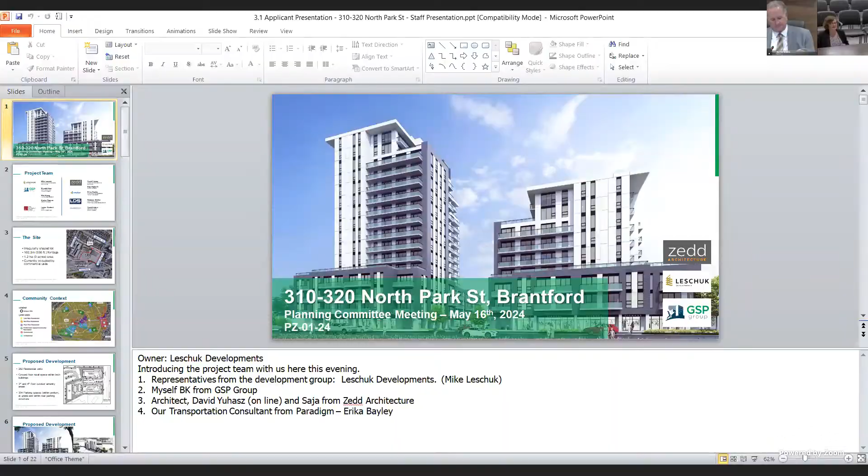Good morning, Mayor Davis and members of committee. My name is Brenda Case. I'm from GSP Group and I represent the owner, Leschuk Developments. With me here today is Mike Leschuk, the owner. Good morning, Mike Leschuk, 16 Kershaver Terrace in Brantford. Also with me today from the architect, Zedd Architecture, I have Saja, and David may possibly be joining on screen. In addition, we have Erika Bayley, our transportation engineer, here to answer any questions regarding traffic.

Next slide, please. And the next slide.

As you all know, I'm sure you've all been to this site a number of times, but I thought I'd provide you a little bit of context.

Directly north, you can see the Northland Gardens development, a 70-unit, two-story townhouse development with an access driveway that runs parallel to the north lot line of the site. To the east, we have apartments ranging in height from 7 to 12 stories. To the west, we have the Hayhurst Village condominium development, with a parking lot and underground parking structure immediately abutting our western property line. That development is a 4-story condominium development.

And then finally to the south, we have a retail plaza, basically 1 story in height, which includes Shoppers Drug Mart, some restaurants, an ethnic grocery store, and other local commercial uses.

So the site overall is relatively flat. There aren't significant grade changes. It does slope to the back.

With respect to vegetation, we have some existing trees along the west and south property lines. A tree preservation plan has been undertaken, and we're looking at saving 11 trees along the west and south property line. The remainder either have symptoms of disease or defects and are recommended for removal.

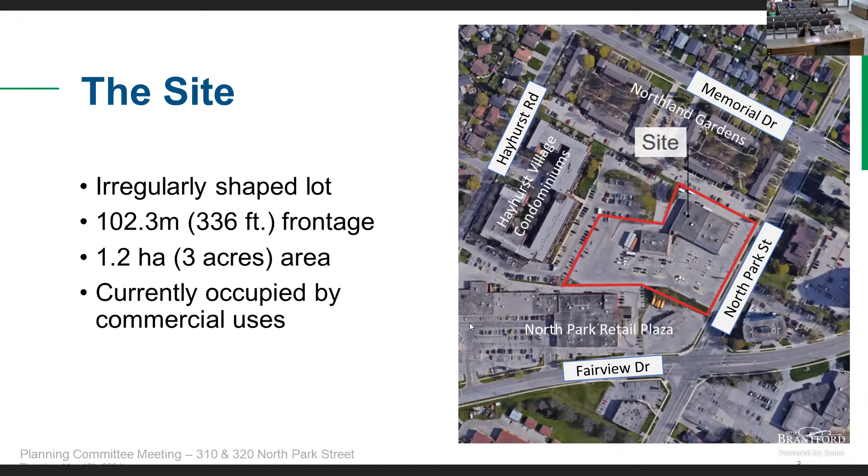Further to the north, we have generally a low-rise residential community with singles and semis.

To the south, we have the Wayne Gretzky Sports Center. We have several parks and schools that surround this area. So overall, it's a low-density residential area in the wider community.

But when we get to North Park Street, we have larger parcels and larger blocks of land. The site itself is well serviced with proximity to retail stores, restaurants, grocery stores, and community facilities. The Lynden Park Mall is further to the east. So all in all, it's a great, centrally located location.

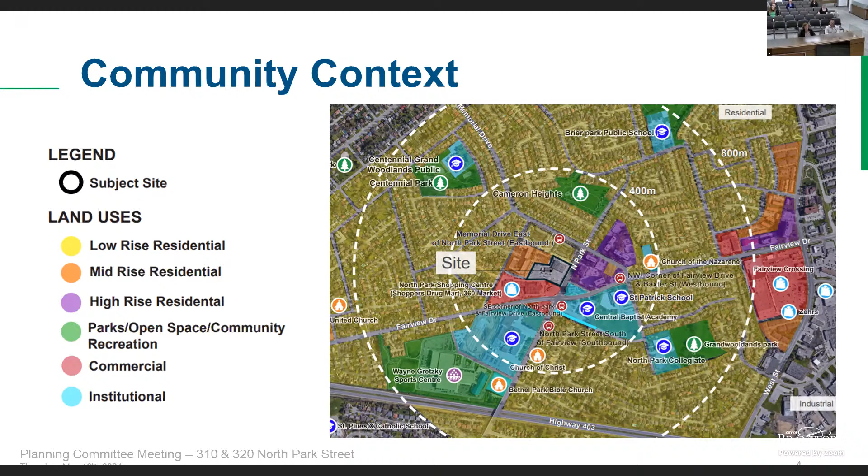Now we're getting to our proposed development. This is a site plan, so you're looking down on the development. What we're looking at is roughly 282 residential units between 2 buildings.

They're 1 and 2 bedroom units that we're proposing at this point in time, ranging in size from 50 to 100 square meters roughly, which is about 500 to 1,100 square feet in size.

We have ground floor retail space in both buildings and outdoor amenity spaces in the form of rooftop amenity areas, as well as indoor amenity spaces in the form of a gym and multi-purpose rooms. Each unit will have its own balcony.

In total, 304 parking spaces are proposed. That's 1 per unit, as well as parking for the commercial uses and visitors. No parking variance is proposed or required as part of this development; we comply with the zoning bylaw with respect to parking.

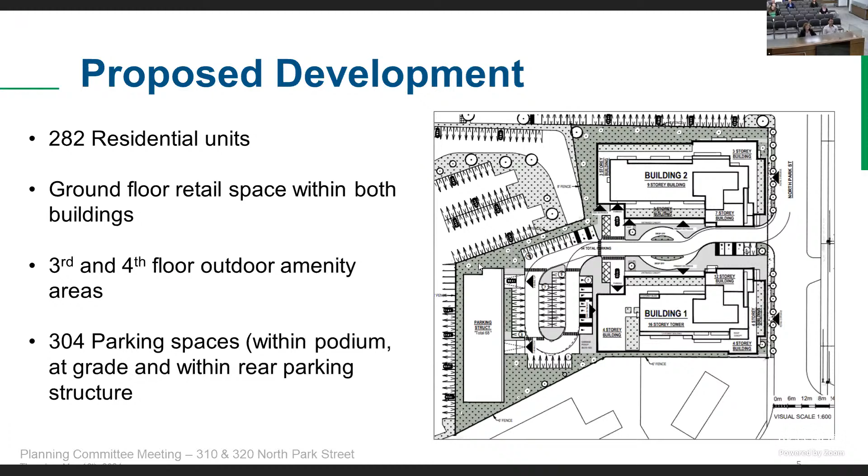This gives you a better idea of what we plan to build, not hope to build, what we plan to build subject to approval.

The building is massed in such a way that we have a defined podium, meaning the bottom part of the building. On one building, it's 4 stories in height—the one on the left is 4 stories. The one on the right is 3 stories in height.

They're both located in a strategic location, with a prominent presence along North Park Street, which contributes to a strong urban edge. So we're talking about new urban development with a strong urban edge that is pedestrian friendly.

The bases for both buildings are designed to be in close proximity to the property line to allow for easy access to the commercial units along the ground floor.

But the ground floor itself is pulled back 6 meters from the property line to provide for a colonnade, which would be covered with a roof. The 2nd story above it provides protection for shoppers and creates a nice area. If we had a restaurant there, you could have an outside patio, and we can provide more street furniture and those types of things.

Both street facades consist of architectural facade treatments, canopies, and extensive glazing, which allows for visual interaction, creating a welcoming and engaging environment. The space between the curb and the building facades along the street offers room for softscape and hardscape treatments, featuring walkway connections to the building and the sidewalk, as well as bike racks. Through the site plan approval process, that space will be more clearly defined with planters and other types of amenities.

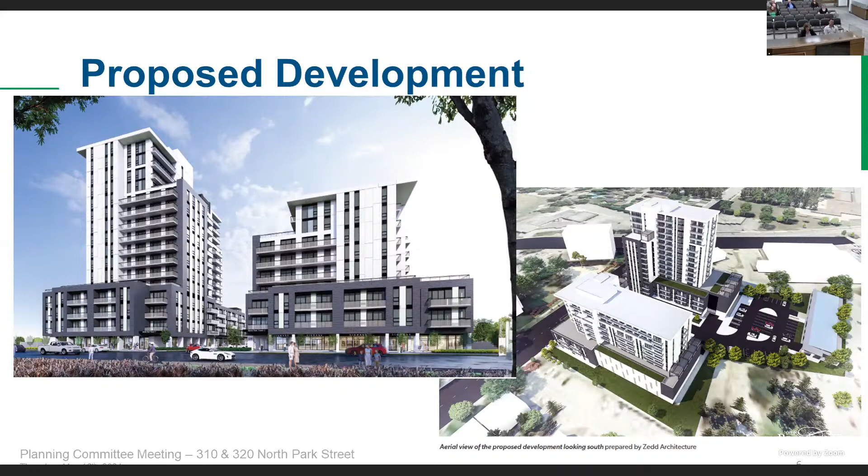This slide gives you an idea of the colonnade, the covered roof. This is the space between the two buildings, and that cover wraps around the building and along the frontage as well, providing a nice, safe pedestrian area separated from the street and the driveway.

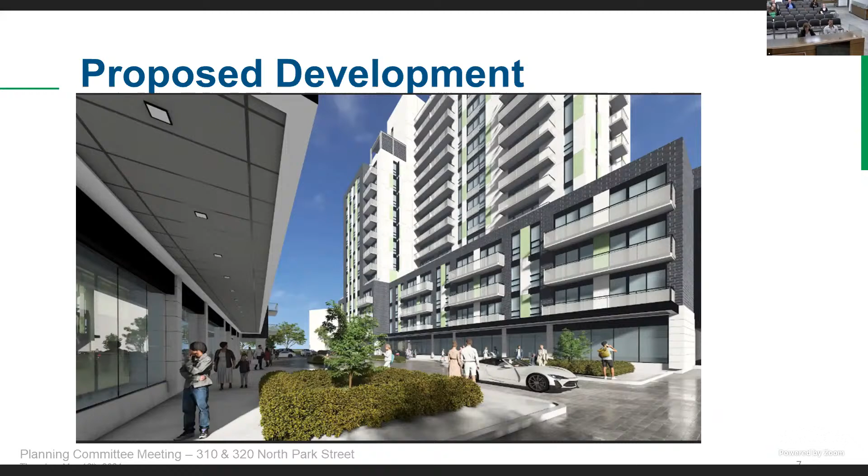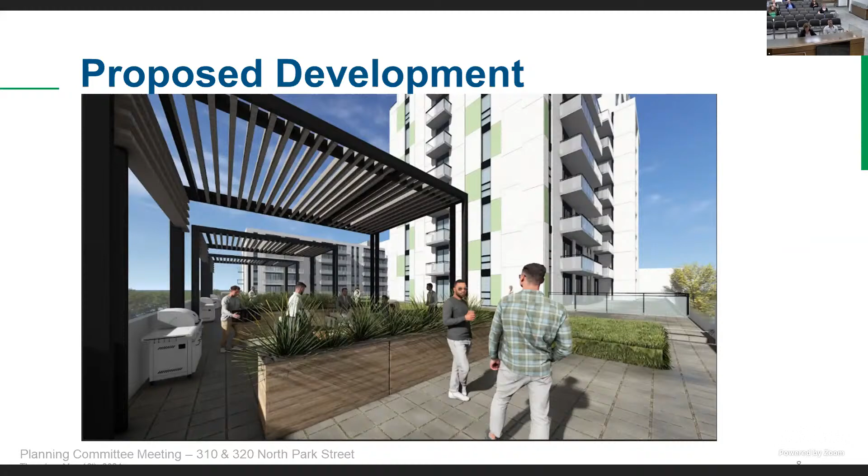From an official plan perspective, based on the 2051 official plan, the site is located within the residential land use designation. That designation permits mixed-use buildings greater than 6 stories in height, subject to a set of criteria, loosely summarized under section 5.2.1M of the official plan. It identifies that the site has to be a suitable size for the development, providing enough space for landscaping, amenity features, buffering, parking, etc. That is something that would be evaluated by staff.

In addition, the city encourages high-rise buildings with structured parking. A large part of the parking will be provided within the two buildings, as well as surface parking and a parking structure at the back. It needs to be located in a highly accessible location, accessible to public transit along a major collector road, and in this case we meet those criteria. We are within less than 250 meters from public transit, and we're close to various community amenities and features, which I discussed at the beginning. So basically, the proposed use and height conforms to the official plan, and an official plan amendment is not required for this development.

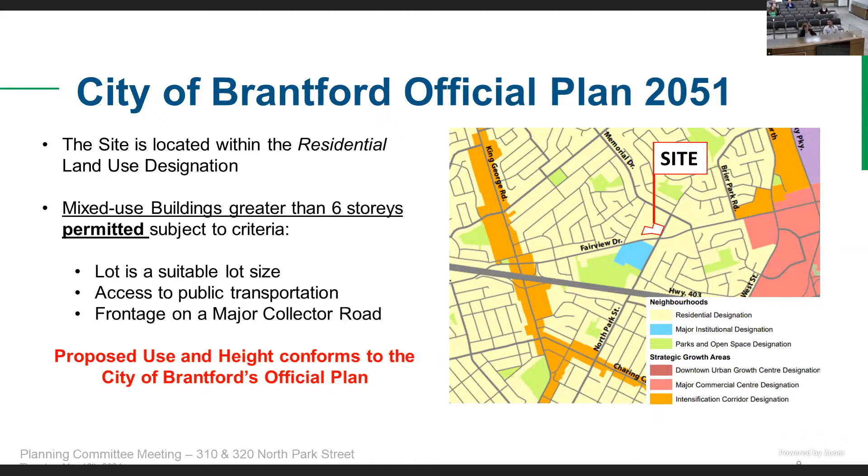So why are we here? The existing zoning bylaw 160-90 zones the site in the C10 Community Center Commercial Zone. We're not looking at changing that zone; we're looking at modifying it. The C10 zone allows mixed use developments in certain areas, and the map within the zoning bylaw identifies where C10 zones for mixed use developments are permitted. Our site is not one of those sites, so we are requesting that it be included, allowing a mixed use development on this site.

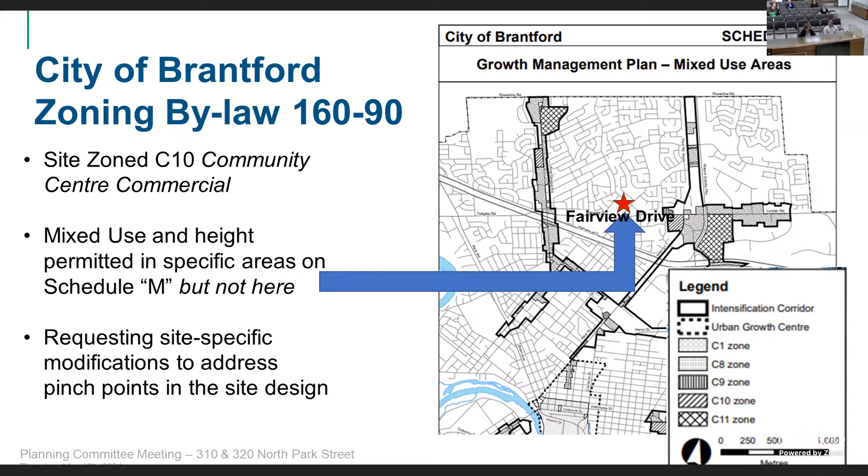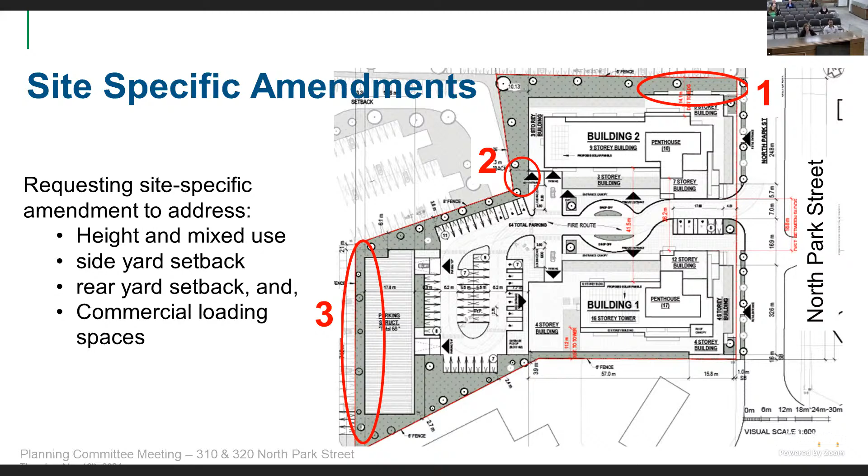This slide shows where the modifications are proposed. Number 1, at the northern boundary of the site, we need a side yard setback modification. Number 2, at the western rear yard of the site, we need a zoning modification for that rear yard building setback. Number 3, we also require a rear yard setback modification to address the location of the 1-story parking structure.

Let's start with height and the mixed use. Building number 1 is a 16-story building, and building number 2, at the north side, is a 9-story building. The image at the top right illustrates this: the red line is what the zoning allows right now, a 6-story building, whereas the portion of the building above that red line, where the blue line extends, is what the zoning bylaw amendment is for. The blue line demonstrates that the official plan allows that height, so we're looking at it on a site-specific basis.

Is this height appropriate at this location? It's permitted subject to criteria, but we have to ensure, based on the modifications we're requesting, that the height is appropriate. So we're requesting a mixed use at this location. Based on the community context, we think this is a great location for a mixed use development. There's commercial development on it right now with a sea of concrete parking. What we're looking at is providing a more active development with more active street frontage commercial uses and residential units above.

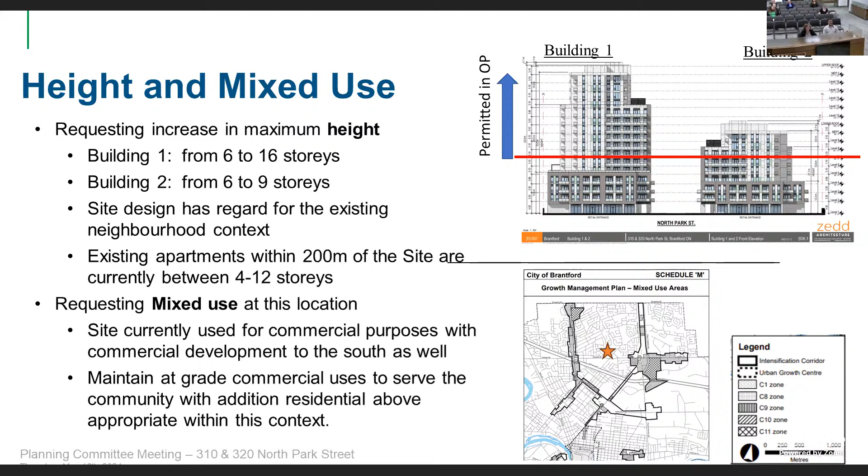Often residents are concerned about shadow impacts of the development. So the consulting team undertook a shadow study based on the city's site plan manual guidelines for shadow studies. Based on those guidelines, the shadow impacts of the proposed development on the townhouse development to the north, as well as the condos to the west, all meet the city standards. When I say no impacts, it doesn't mean there's no shadows, it means there's no unacceptable impacts based on the city's criteria. I'm going to go into a little detail in the next couple of slides, but there is a detailed shadow study.

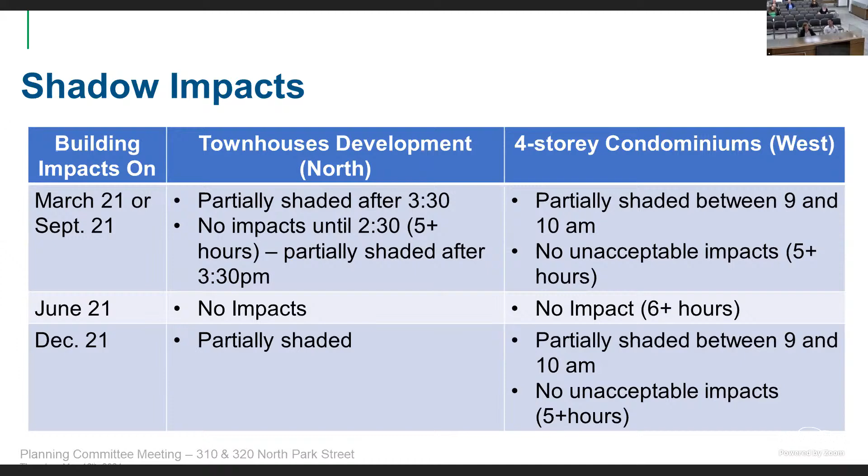This slide shows the spring equinox, which is one of the dates we have to address in our shadow study. To the north townhouses, there's no impact until 2:30, but there's still 5 hours of unobstructed sunlight to the north. To the west, we have partial shading between 9 and 10 a.m., but other than that there's no impacts and full sunlight for plus 5 hours. On March 21st or September 21st, the sun is at a certain location and it moves, so the shadow will move as a result.

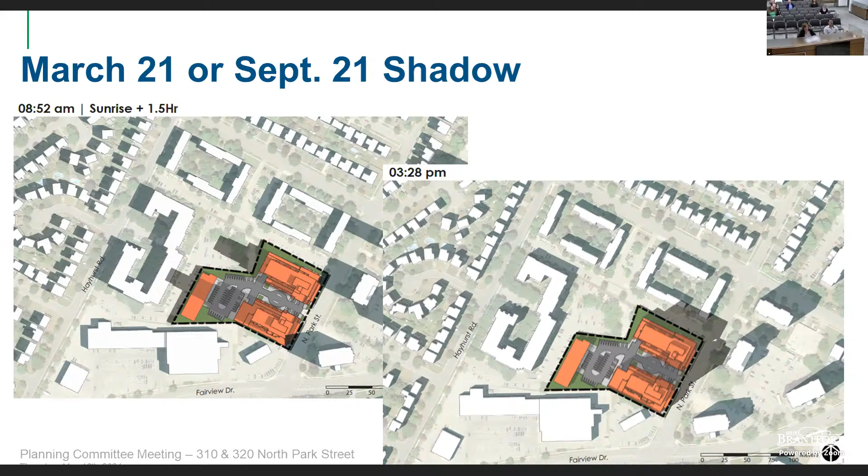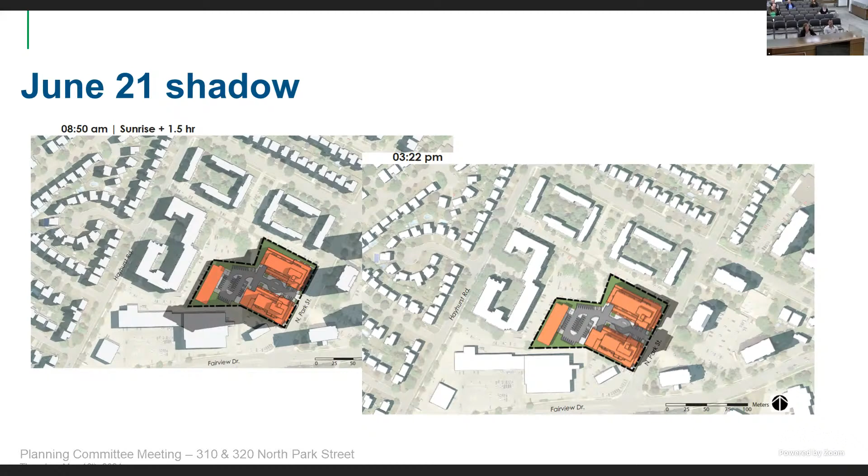The next one is the summer solstice, which is the longest day of the year. This demonstrates that there are no impacts to either development based on the guidelines. So based on the summertime shadows, there should be no negative impacts from shadows.

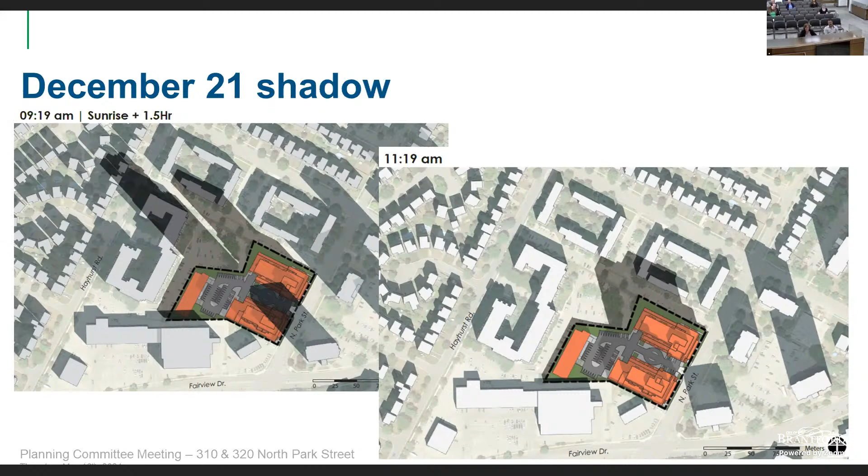The winter solstice plan shows that this is when shadows are their longest, the days are shortest, but the shadow again moves. We have partial shading between 9 and 10 a.m. to the west, but there's still 5 solid hours of unobstructed sunlight. To the north, the townhouses are partially shaded as well. This is the time of year when fewer people are outside, the days are shorter, and that's why the shadow impacts are acceptable from the city's criteria.

Next, I'm just going to quickly go through the site-specific modifications we're looking for. Let's start with number 1, which is the interior side yard setback at the north end of the site.

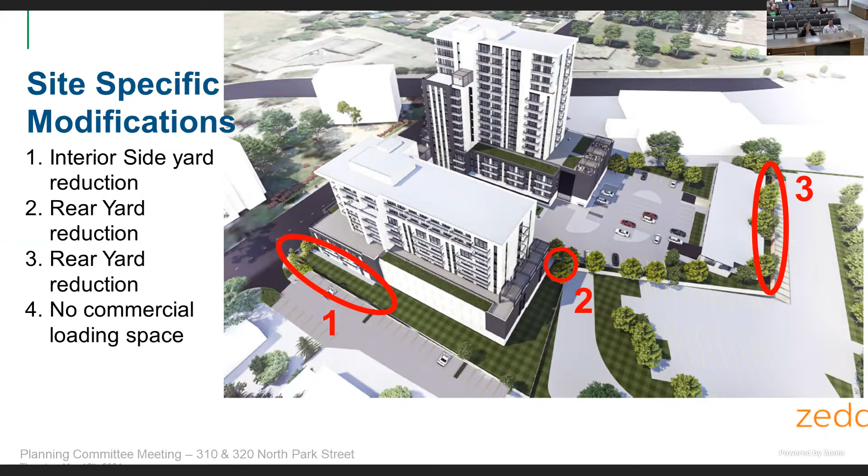The variance we're requesting is 6 meters versus 7.5 meters required. The reason we had to shift the building further north was our access driveway was located too close to opposing access driveways on the east side of North Park Street. By shifting the access in between the two buildings further north, we ended up needing a small variance at the north end of the building. This particular side yard abuts the access driveway to the townhouses to the north, which is their parking lot and access driveway.

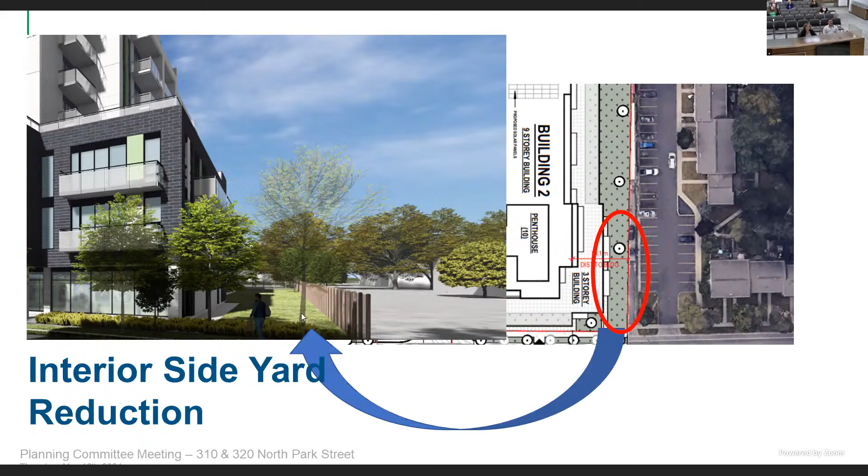The remaining 2 variances pertain to the setback of the parking structure, as well as the building setback from that corner, the pinch point. We're going from a required 7.5 meters to 6 meters at the pinch point, but 3.3 meters where the parking structure is located. That variance from 7.5 to 3.3 meters is larger than we'd like it to be, but that area backs right onto a parking lot and the underground parking structure of the Hayhurst development to the west, so the impacts to the residents' balconies won't be negative.

We're looking at putting a solid board fence along that lot line, as well as plantings. That particular parking structure is only 1 story in height, and we can deal with the details at the site plan approval stage in terms of the construction of that building, as well as what type of plantings and fencing would be appropriate along there.

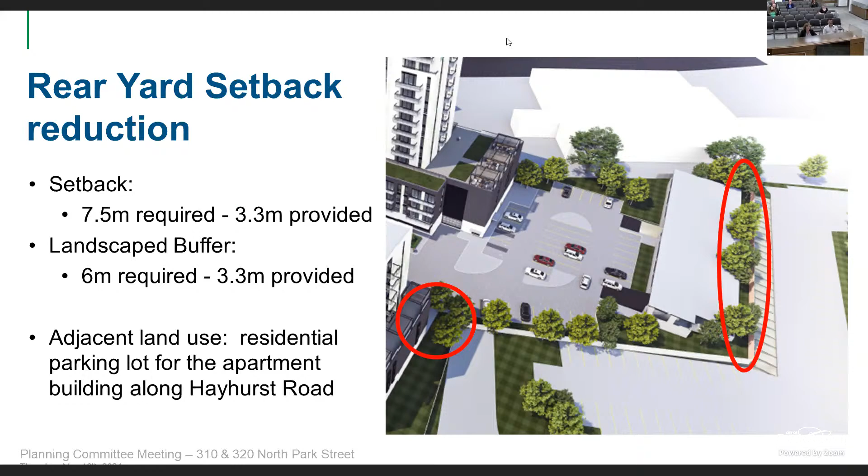The last variance deals with loading spaces. Based on the current zoning, we're required to have 1 loading space per building, so 1 on each side, as well as 1 commercial loading space. In this instance, we believe that 1 loading space per building is sufficient for the commercial spaces as well, so they're going to share the loading space with the residential building. The loading space is internal to the building, so that will be more appropriate for the commercial units as well.

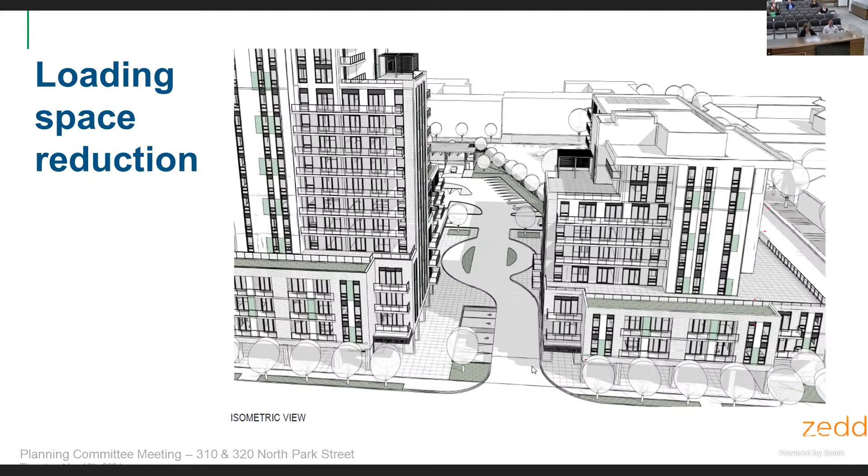We did have a community open house. It seems like a very long time ago - it was held in December of last year, and there were 14 residents that attended. We provided flyers to residents within 160 meters of the site, and the meeting was at the Braemar House School, about 800 meters south of the site.

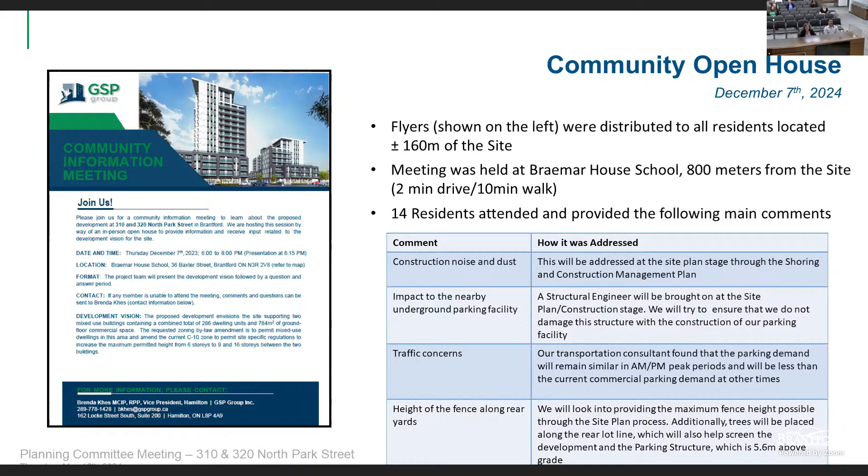We had quite a lively discussion at the open house. The majority of the issues in my mind related more to the construction, the future construction - construction noise and dust, the impacts of the underground parking facility on construction. There were traffic concerns which were addressed at the meeting by our traffic consultant, and there was a discussion about the style of the building.

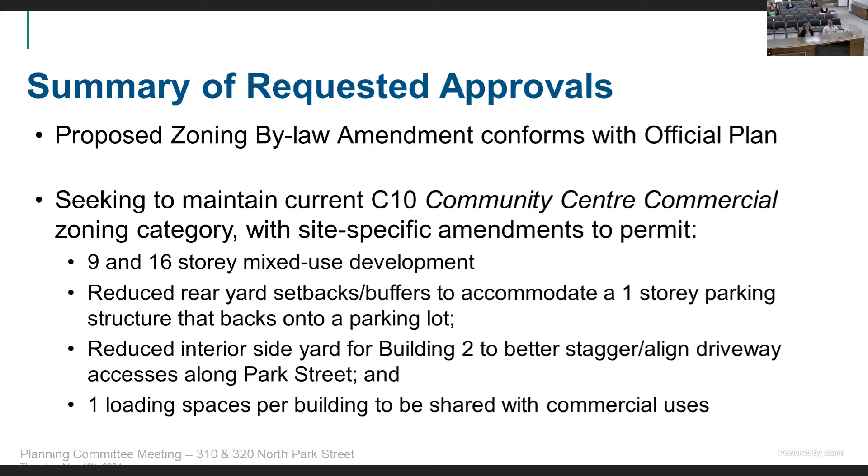Councillor Carpenter: Thank you, Mr. Mayor. And thank you. When do you plan to be in the ground if all approvals are in place? And what assurances do we have that you are actually going to build this building? It's a really good question.

What I can tell you is that we're one of the only developers that's local that builds high-rise buildings, and we want to go in the ground when all of the conditions are right. That means economic conditions, the property being leased out to current tenants, of which we both have to acknowledge our commercial obligations, both tenants and landlord. So all of those things would need to be sorted out. As soon as all of those conditions match up, we would go in the ground.

I was encouraged that you were local, by the way, as it gives me some assurance that it's actually going to happen. So now you've got 2 buildings on site - these are going to be condominiums. Are they going to be building 1 and building 2? Are they going to be separate condominium corporations, since you're going to build them at different timeframes?

The plan right now is it'll be a single standard condominium corporation for the whole development - including the commercial. That's correct. Yeah, that's better for the condominium corporation as well. That's right, that's good to hear that as well.

One more question, Mr. Mayor. The fencing - you talk about the fencing along the backside, the Hayhurst Village. Currently there's no fencing there, and it's been a problem; I know the Ward 3 Council will speak to the issues they've had over the past with access points there. When you talk about the fencing, are you talking about a commercial wood fence? Yes, a solid board fence. Maybe we could work with our building department, who for some reason has a 7'2" height restriction when 8 feet, who throws away 10 inches on every board - 8 feet would make more sense.

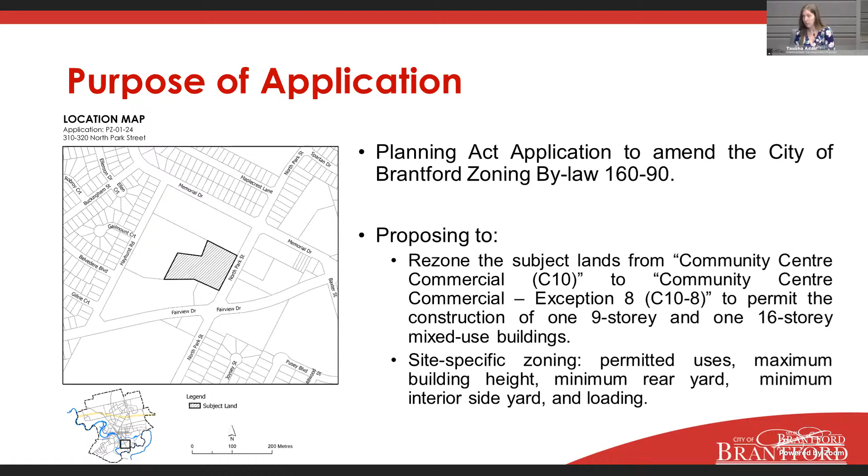So the amendment, as previously mentioned, will facilitate the construction of 1 nine-story mixed-use building and 1 sixteen-story mixed-use building. Site-specific provisions are required in order to permit the use, the maximum height, rear yard, interior side yard, and loading. This has all gone through already in the previous slide. It is on the western portion of North Park Street, north of Fairview Drive, approximate area of 12,271 square meters, and currently occupied by a commercial plaza.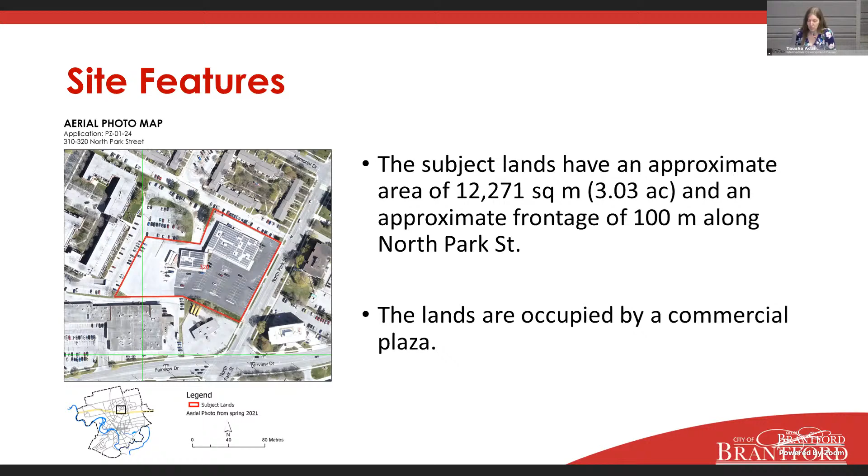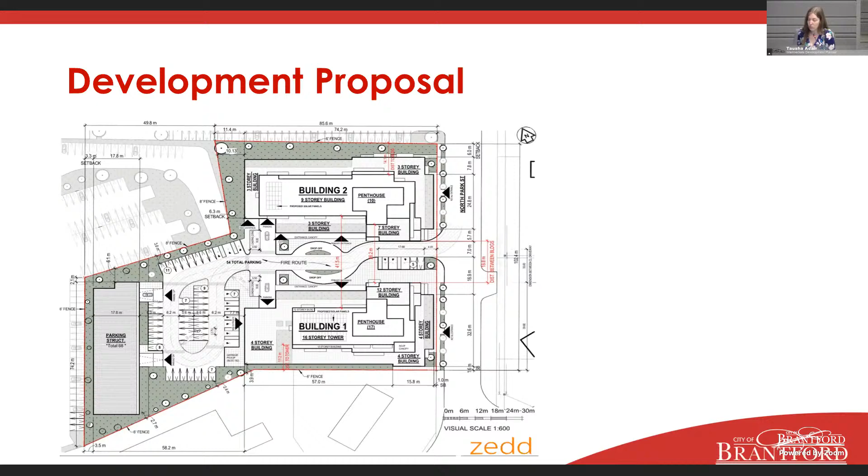So this is the site plan on screen here. It will facilitate, as previously mentioned, 282 residential units, 4 ground level commercial units, and a 1-story parking structure.

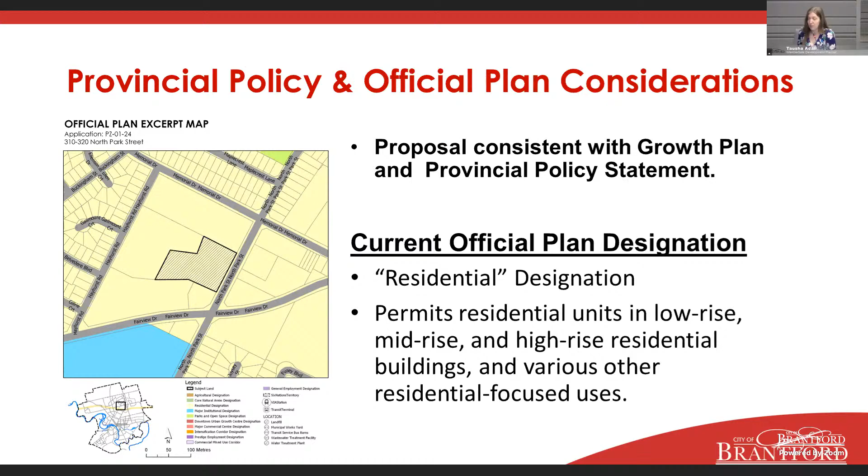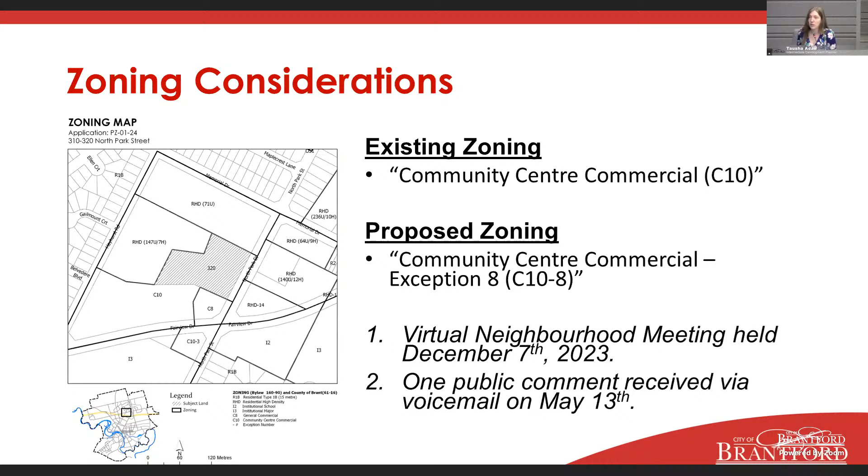The lands are designated residential under the official plan, and the application was evaluated with respect to the provincial policy statement, the growth plan, and the official plan, in which staff have determined that the development does conform. The site is currently zoned C10. They're seeking site-specific provisions to the C10 zone, not a zone change itself. A neighborhood meeting was held on December 7th of 2023 in consultation with ward councillors. One public comment has been received to date, on May 13th, just a couple of days prior, with comments regarding the proposed building height and the shadowing.

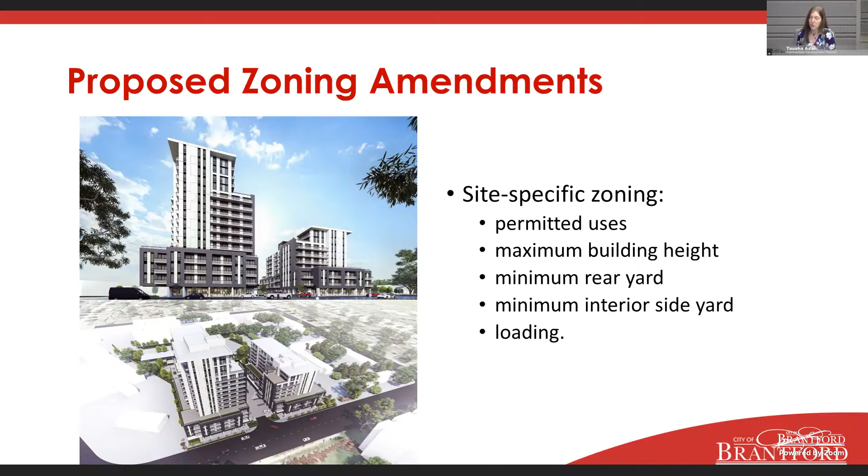Oh, geez, sorry about that. Yes, so on screen here is a couple of renderings provided in the architectural set, as well as the site-specific provisions that are required, which will be gone through in more detail on the next slide.

So the C10 zone does permit mixed-use buildings in accordance with subsection 9.10.2.7, which indicates that any lot of this zone must be in accordance with Schedule M. As previously mentioned, the subject site is not within Schedule M, and therefore an amendment is required to permit the mixed use on this site. Maximum building height of 6 stories is permitted under the C10 zone, whereas the development requires a maximum height of 9 stories for building 2 and 16 stories for building 1.

A minimum rear yard of 7.5 meters abutting a residential zone is required, whereas the development provides 6.3 meters for building 2, and 3.3 meters for the parking structure at the rear of the site.

A minimum interior side yard of 7.5 meters is required abutting a residential zone, whereas the proposed development provides 6 meters for building 2.

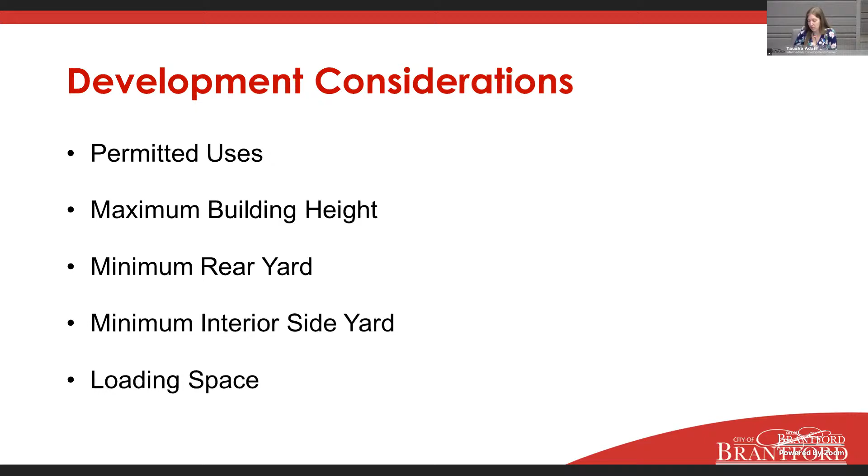Lastly, for loading spaces, under the current bylaw, the minimum loading spaces provided for mixed-use buildings must be in accordance with Table 6.2. Table 6.2 requires that 1 space be provided for developments with a GFA over 300 square meters and up to 1850 square meters, whereas 0 are proposed.

So to conclude, the amendment application is consistent with the provincial policy statement, the growth plan, and the official plan. It is considered compatible with the surrounding land uses and will assist in meeting the future needs of the residents of the city. That would conclude my presentation.

I'm happy to answer any questions. Thank you, Tasha. We'll see if there are any questions.

Councillor Carpenter: Just a quick one, great presentation, but the planner for the applicant did such a tremendous job of the application. They covered everything that you covered, but it's still a fine presentation. I'm just wondering, on the fence heights, it was more a request if we could check with our building department and get our limit changed to a reasonable number, like 8 feet instead of 7.2. I know the 7.2, it's always bothered me. It came from the 6-foot fence, and then the 2x4, and then the lattice, and that's where the 7.2 actually comes from. As if everybody's building the same kind of fence, and 8 foot makes more sense for privacy and for something clearly, especially on the commercial side. So just want to request that. The rest has all been covered, but the ward councillor, I think, done a great job here. Thanks.

Tasha, I got a couple of questions for you. It has to do with the height of the building. So in the presentation by the applicant, we were told that it does comply with the official plan, but not the current zoning, correct? Through the chair, that's correct.

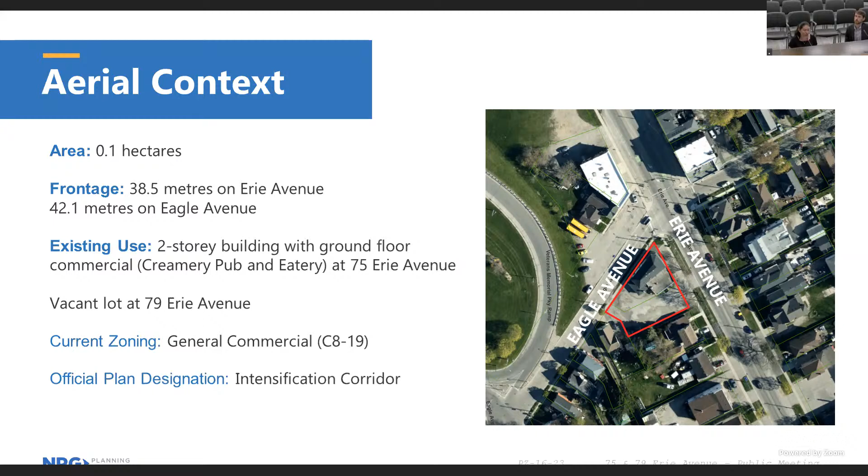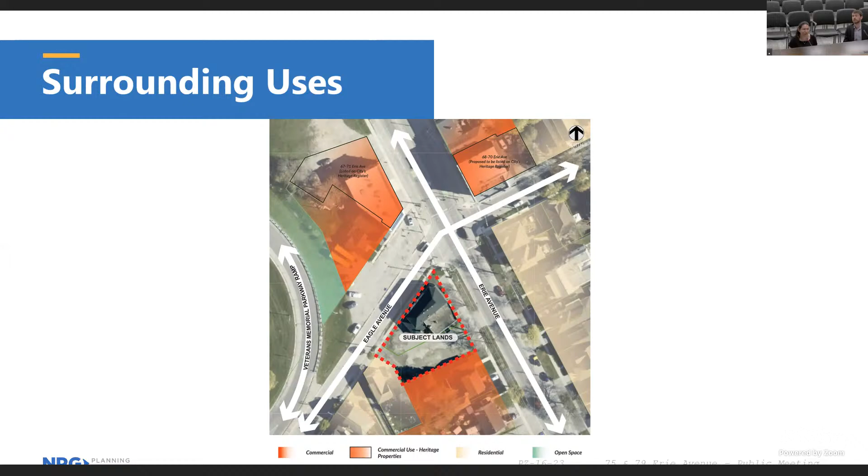This designation is part of the city's strategic growth area and is intended to accommodate higher density mixed-use development to support an integrated transit system. Specifically, the official plan policies speak to creating pedestrian and transit-oriented development through residential intensification and a high quality of urban design. The official plan policies specifically permit mixed-use mid-rise buildings in this designation, and specifically along Erie Avenue, it permits a height of up to 6 stories.

In the city's urban design manual, the intersection of Erie and Eagle Avenue is designated as a mixed-use building node, which is the first priority area for development of mid to high-rise mixed-use buildings. So given this existing neighborhood context and policy context, it creates an intent of the neighborhood as an area for a focus for residential intensification and redevelopment.

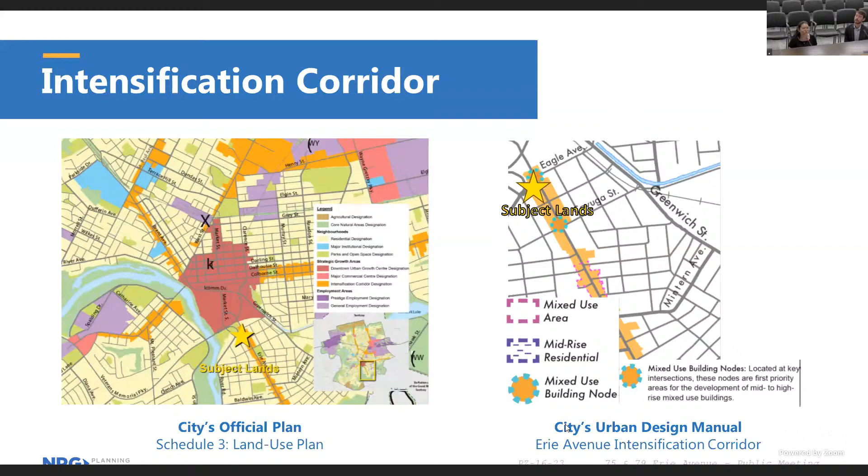We're proposing a zoning bylaw amendment application to facilitate a 6-story mixed-use building, which is intended to be rental, with ground floor commercial uses and 20 residential units at grade. The building will have 18 parking spaces on site with 1 accessible space and 3 on-street commercial spaces along Eagle Avenue. The driveway access will be from Erie Avenue and exit onto Eagle Avenue.

We relocated the on-street commercial parking from Erie to Eagle Avenue. Relocating the parking would avoid the removal of trees on Erie Avenue while allowing for enhanced streetscaping along the Erie Avenue frontage. While detailed landscaping will be provided at the site plan stage, this is a solution that we've been working with staff on, which allows us to appropriately address both the reduced parking rate and the landscaping coverage.

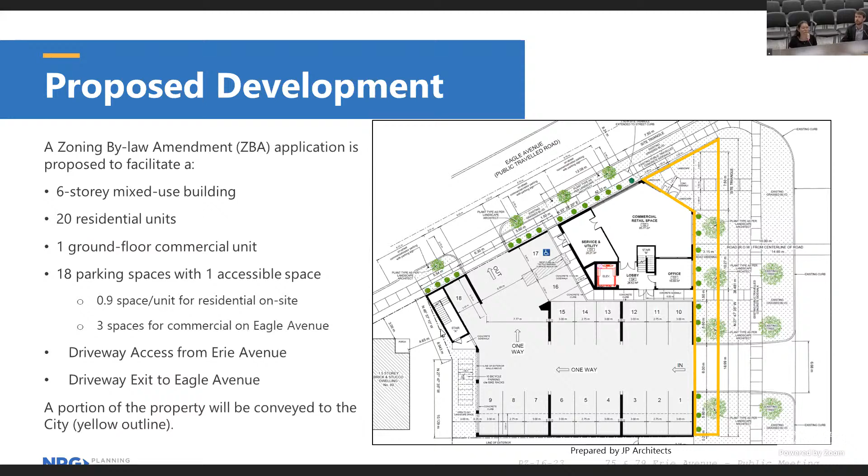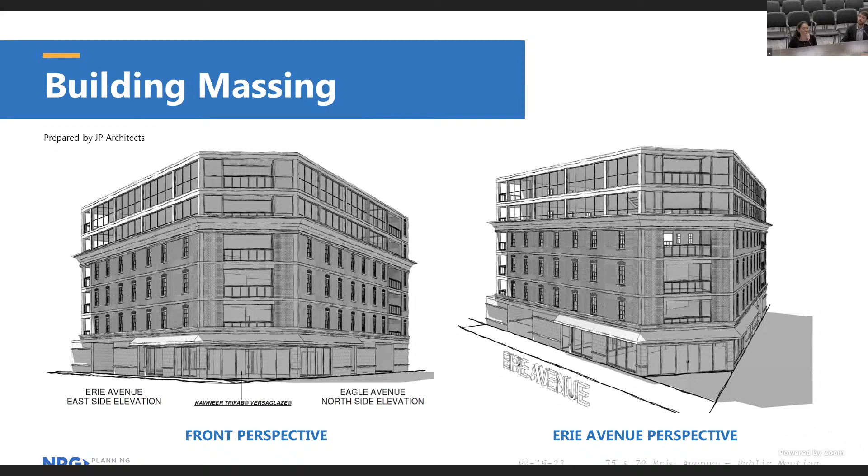These are some renderings showing the potential development. As you can see, the commercial entrance is located at the corner, which is a prime location in order to address the intersection of Erie and Eagle. The building uses brick and architectural detailing in order to ensure compatibility with the buildings to the north, and the use of glazing and windows on the upper stories helps to mitigate the massing of the building. Parking, as you can see, is also covered and screened from the street.

We're proposing a zoning bylaw amendment application with site-specific provisions for minimum landscaped open space, parking, and minimum interior side yard. I should note that this is a modification within the current zone.

With regards to the landscaped open space, we're requesting this reduction because the property is very constrained. Through the allocation of the road widening to the city, this impacts the ability to provide landscaping on site. We anticipate that the area allocated to the city would be used for landscaping, and as mentioned before, through discussions with staff and as shown in the site plan, we're providing for enhanced streetscaping on the Erie Avenue frontage as well.

We're also requesting a reduced parking rate for the residential component, an overall reduction of 2 parking spaces for the residential. Again, recognizing the constrained nature of the site, the proximity to downtown, and the access to both cycling routes and transit, as well as conversations with the city's transportation staff, we considered that this reduction would be appropriate for the development.

And lastly, we're requesting a decrease of the interior side yard at the ground floor. Again, due to the lot size and the developable area as a result of the road widening, there isn't an opportunity to accommodate the 5.5 meter setback. However, parking is screened on the ground floor, and we're proposing a 3 meter setback on the upper floors in order to maintain privacy and provide the adjacent property with additional buffering.

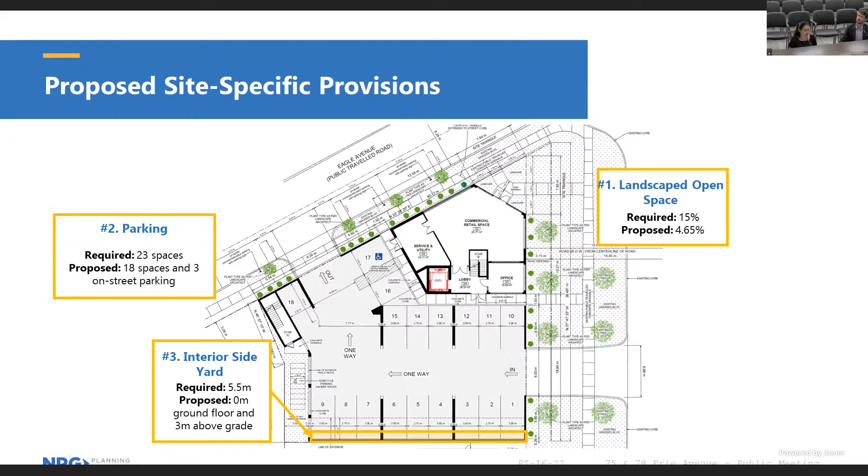The supporting studies that were submitted with this application include the planning justification report, the urban design brief, the architectural plans and the shadow study, the engineering report and plans, the heritage impact assessment, the noise study, and the geotechnical report.

Through the zoning process, we've received comments related to heritage, building tenure, and more, and have received a number of comments in support of the application. We'd like to spend some time addressing these comments here.

Regarding the recommendations of the Heritage Committee, the vibration study and building coverage are items that can be addressed at the site plan stage. Regarding the recommendation on retention of existing features, our heritage expert, who's here today to answer any questions, concluded in the heritage impact assessment that there aren't any historical features in the building that should be retained.

However, the applicant is open to exploring some type of commemoration of the building's historic use. We also received questions on the building tenure, and at this stage, the building is intended to be rental. Lastly, we received comments related to construction, timeline for construction, fencing, and future commercial use, and want to note that this will be dealt with at the site plan and building permit stage, which is after the zoning.

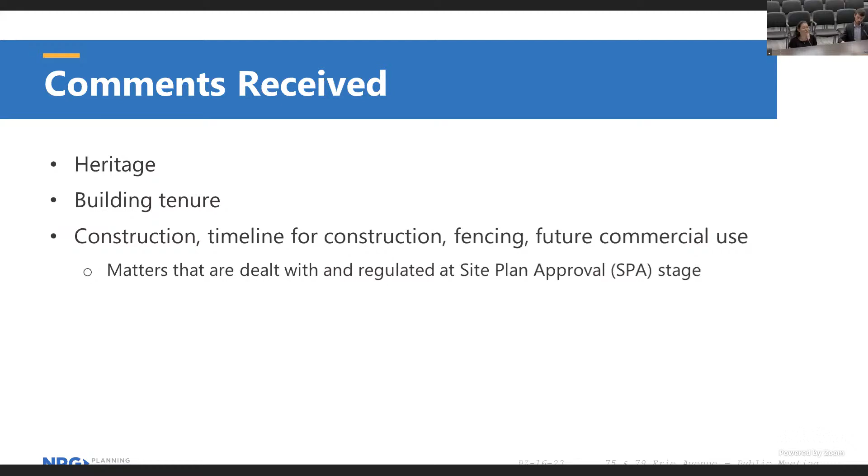I also wanted to touch on the holding symbol, which staff are proposing for the on-street parking and streetscaping, as well as the functional servicing report. We've reviewed these comments from staff and are working with staff to address them, and hope to address these items before the bylaw is passed.

In conclusion, the application is consistent with the provincial policy statement. It conforms with the growth plan and the City of Brantford official plan. It contributes to intensification and a range of housing options in the neighborhood, provides an opportunity to make efficient use of land and existing services and infrastructure by directing growth to an area designated for residential use and redevelopment. And lastly, it is compact, transit supportive, and is a well-designed built form with the surrounding uses from an urban design and land use compatibility perspective.

That concludes my presentation. Thank you.

Councillor Van Tilburg: Could you highlight where this encroaches on the city land?

Through the mayor: it's through the site plan process, there will be road allowance widening that's taken and a daylight triangle. So the building itself isn't encroaching on city land, but it's going to be pushed away from the road allowance. The front of the building at the corner won't be on city land or in that daylight triangle. Through the mayor, no.

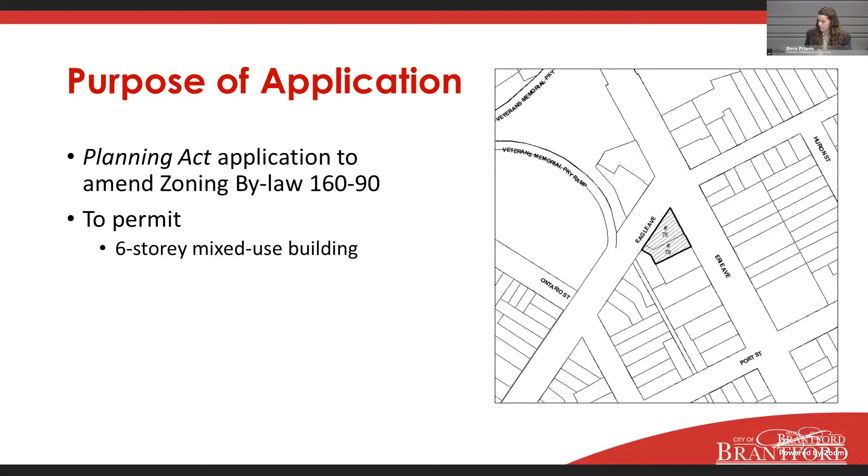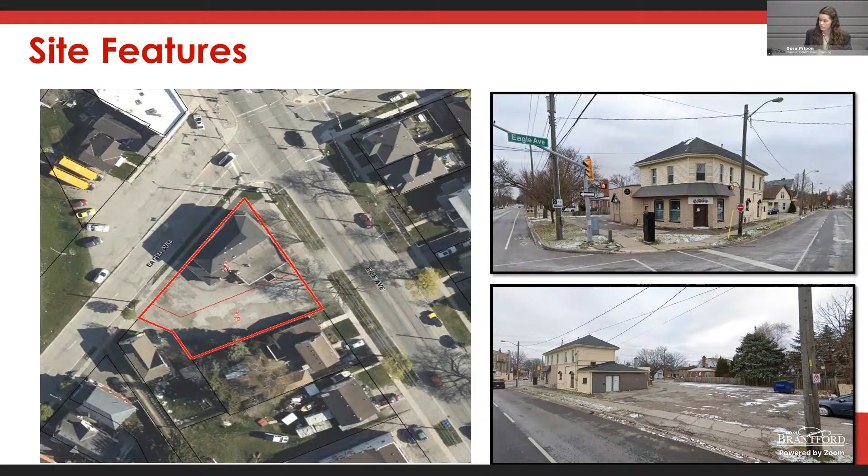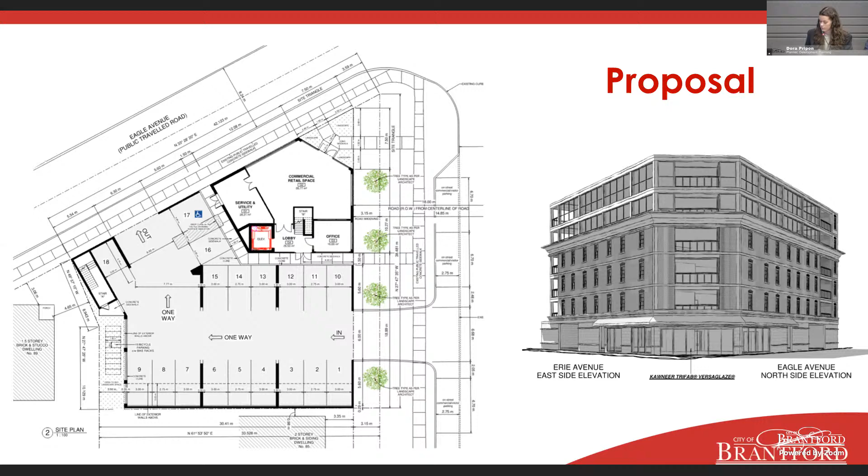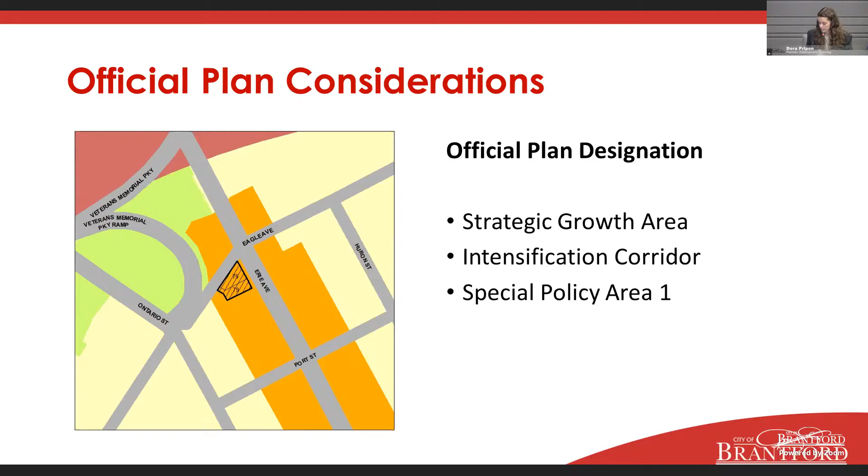The lands are designated intensification corridor in the city's official plan and are considered a strategic growth area. The designation permits mixed-use buildings as proposed and limits building heights on Erie Avenue to 6 stories. The site is also within Special Policy Area 1, which wouldn't permit basements or more sensitive uses. The application was evaluated with respect to the provincial policy statement, the growth plan, and the official plan, in which staff have determined that the proposed development conforms.

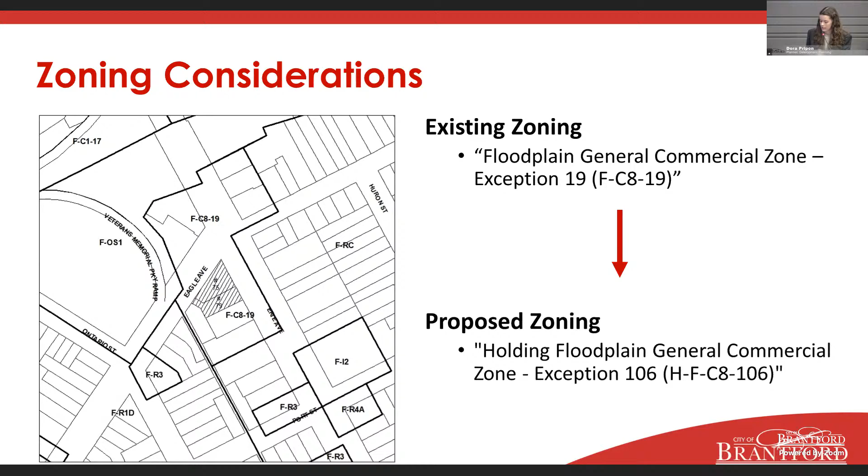The subject lands are zoned floodplain general commercial zone, exception 19 in the city zoning bylaw. And again, as the applicant discussed, the purpose of the rezoning is to establish site-specific provisions to recognize a reduction in interior side yard setback, landscape open space, and parking.

Staff also recommend a holding provision be put on the application until 2 conditions are met. The first being the preparation of a streetscaping and on-street parking plan, and then the second being a revised functional servicing report that satisfies the city's requirements.

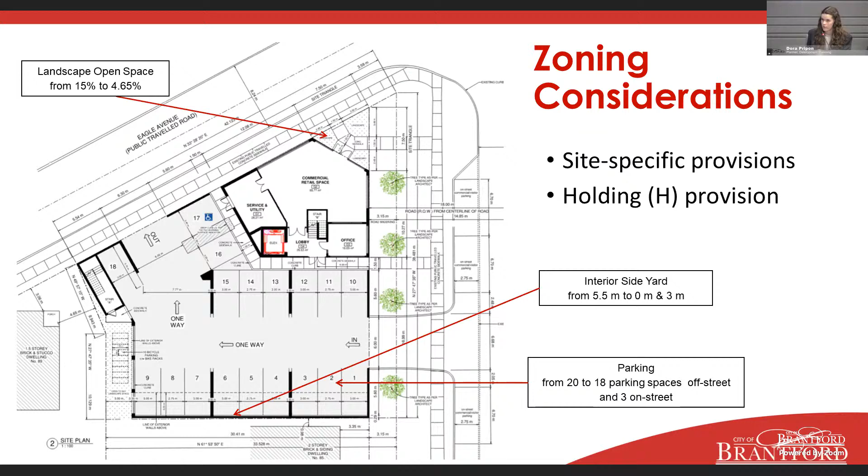Among other development considerations discussed in the report, the notable ones analyzed were parking, heritage, and public engagement. So for parking, transportation staff have determined that the reduction of 2 parking spaces is appropriate for the development, and this is based on analysis of unit size, walkability of the neighborhood, nearby transit routes, and distance from downtown.

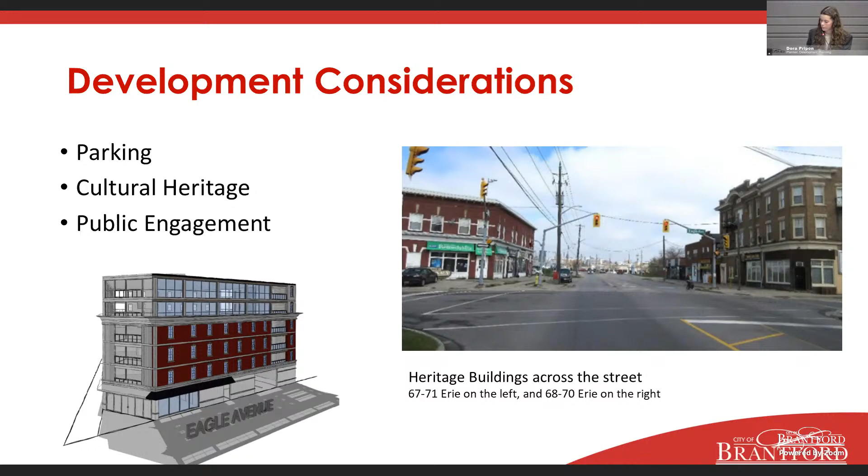For public engagement, the application was circulated to all property owners within 120 meters of the site, and a neighborhood meeting was held on March 7th of this year. The main topics brought up at the meeting were detailed in the report, as well as the responses to those comments. It is staff's opinion that all public comments received can be addressed through the holding provision and future requirements of the site plan phase.

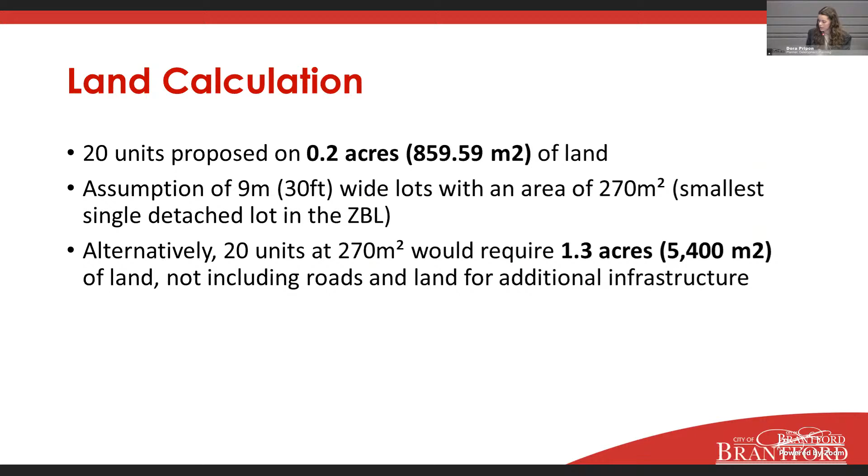In conclusion, this application is consistent with the PPS, with the growth plan, and the city's official plan. The proposal will facilitate the appropriate development of an underutilized site. The design will match the character of the neighborhood and will contribute to a vibrant streetscape in an intensification corridor. Thus, planning staff recommends the application PZ-16-23 be approved. Thank you, and we're happy to answer any questions.

Very good start, Dora. So, questions, Councilman McCreary.

Well done. Thank you. I'm going to ask you the same question I asked about the 3 parking spots because I really have no idea what that means. I don't believe I've ever seen a developer make use of city property as part of their application before. Could you take us through that? Through the chair, I'm going to defer that to our transportation project manager.

Jeff Cornwell, Project Manager, Development Transportation. Through the chair, this is a similar situation to the block of commercial and mixed-use buildings we have on Erie Ave between this site, between Eagle Ave and Clarence, where a lot of the businesses there, such as Wingmaster, don't have any dedicated parking themselves. They are relying on parking within laybys within the city's right-of-way. So we were looking at a similar concept for this development.